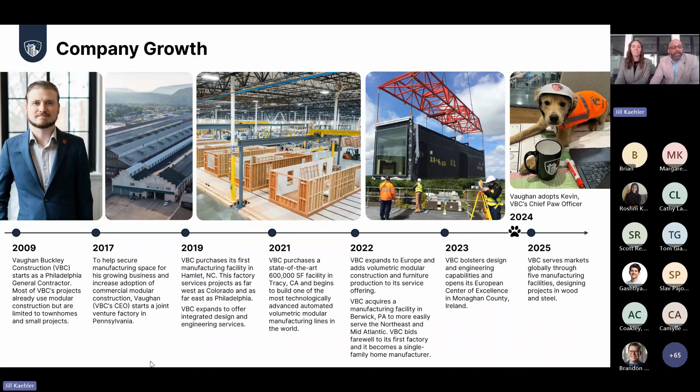There we go. So why modular? What are we here to learn about today? Time is money. In an industry where costs seem to only be going up, every month that we can save on the front end is a month of general conditions. Every month on the back end is a month of operating revenue.

Certainty is super important. Providing certainty starts with increasing predictability. For VBC, that's all about controlling supply chain and products that go into our projects. As a result, the volumetric modular portion of a project is often the largest percentage of a project, thus increasing the certainty over the entire project.

Better buildings. The manufacturing process itself really provides a level of quality control over simple things and simple tasks like draft stopping, sealing of exterior penetrations, things that just aren't possible with site-built construction. And as a result, every project we provide inherently performs better.

Sustainability comes standard with our product. You're not paying more for something that really should be common practice. For VBC, this is not a marketing message. I know that's common out there in the world today. It's embedded in the way that we do our business. Improved efficiencies. Automation provides a more consistent takt time with greater accuracy than any site-built construction can. It's a great advantage that we offer.

And then lastly, flexible designs. As a client, leverage our catalog of standard units, finishes, and products to fully unlock the advantages volumetric modular can provide.

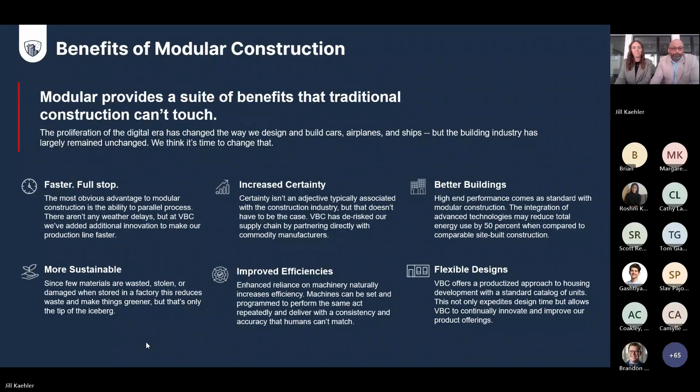So what we're here to talk about, the word modular can often mean a lot of different things across the globe and to a lot of different people. Specifically for us, volumetric modular is where the entire 3-dimensional units are manufactured offsite, transported to the site for assembly. These units include structural elements, interior finishes, full MEP services.

This is really the heart of the value proposition volumetric modular provides. It's really that balance between providing the highest possible level of finish inside the units that minimizes the cost to connect and complete once on site.

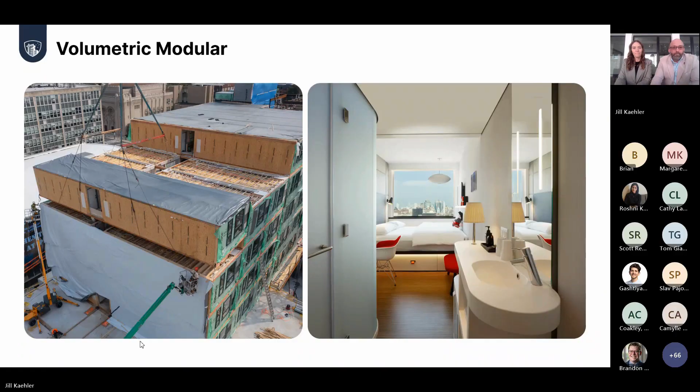So where do we do this? Where do we make sense? So from our Berwick facility here, Northeast PA, using our VMX product, we do Type 3 and Type 5 wood frame projects. We serve a 500-mile radius and a 300-mile zone. The 300-mile zone is ideal for transportation efficiency.

It's closer, it costs less to transport, while areas in the 300 to 500 will often incur a slightly higher premium for transportation. It's further away, it costs a little bit more to ship them there. It makes sense. Oftentimes, these are also going into lower cost of labor areas as well. And that combination can make projects in this radius sometimes financially challenging.

That said, there's also projects on a case-by-case basis that break down this conventional wisdom. Some of the reasons why are the lack of available labor, think limited construction seasons, and maybe that you have the need to just truck in all your materials anyway. Modular can also make sense under any one of those circumstances.

For later reference, our case study 1 that Jill will talk about later is a project that's within the 300-mile radius, and you'll see the values that creates. And then in case study 2, that one's outside of that. That's within the 500-mile radius, and we'll talk about the impact the location specifically has on selecting modular for each of those examples.

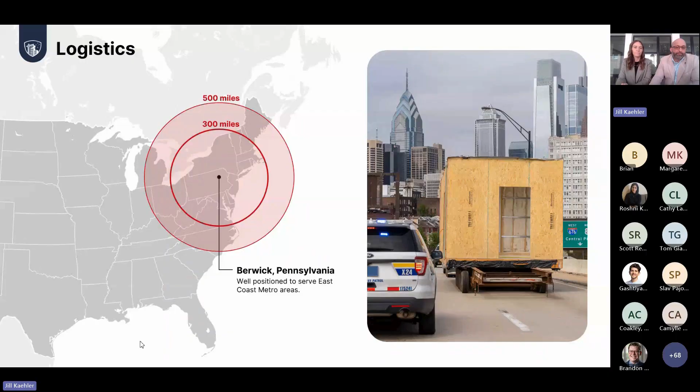Oops, sorry, apologies. So why modular? Why VBC? We've really been fortunate. We've done 3.6 billion in real estate assets, 6,000 modules. We've got an incredible team with a lot of experience, and we're really looking to offer that experience back to the industry to help drive the entire construction sector towards making volumetric modular their preferred choice and not just an interesting option.

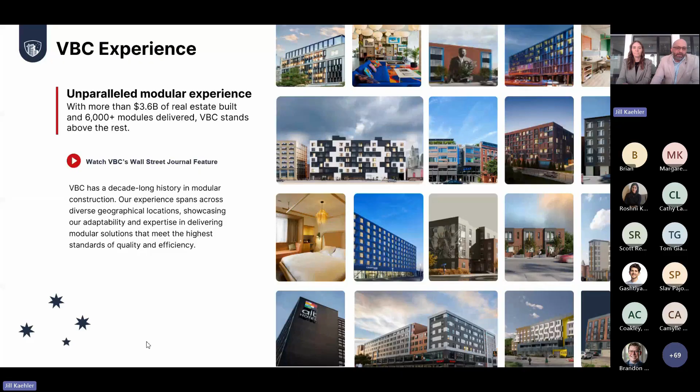And then a few examples of that relative here, student housing examples from our U.S. portfolio. This project was providing privatized off-campus housing for UC Berkeley. It's named 44th Street. It's in Oakland. It's a West Coast project. It was about 150 beds, 5 modular stories, 143 modules.

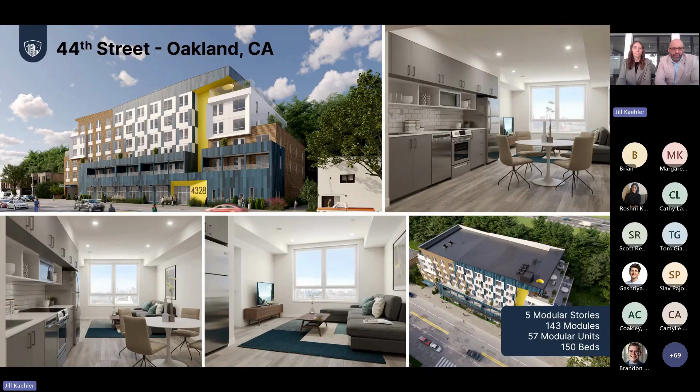And then our next one here is another West Coast project in Berkeley, California, called 1598. This one was much larger. It was about 245 beds, and again, also provided privatized housing for off-campus students at UC Berkeley.

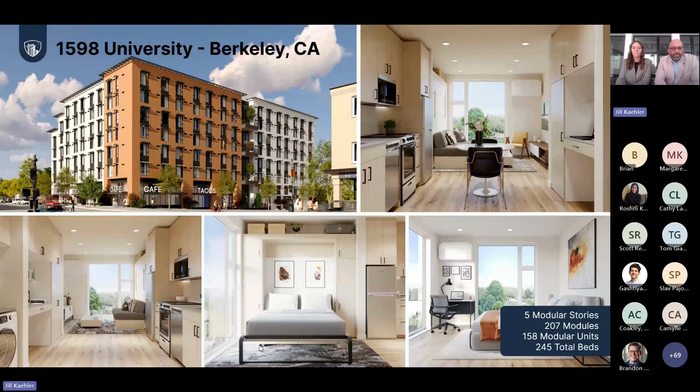Lastly, as a value-added service to our student housing clients, we offer the ability to also include and install project-specific furniture packages during modular unit manufacturing. This contributes to the project's ability to maintain schedule and deliver on time. It's a value-added service a lot of our clients take advantage of.

Hand it over to you, Jill. Thank you.

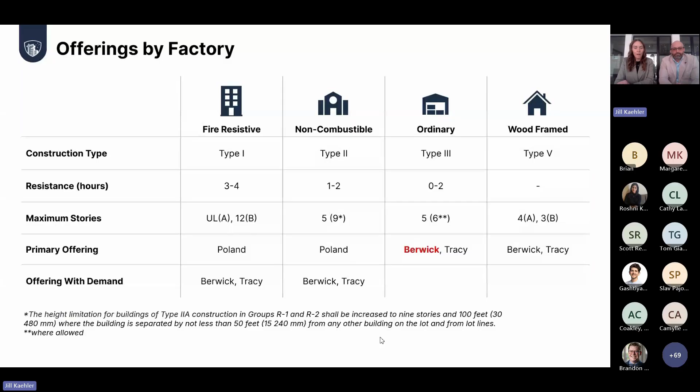So VBC has multiple product offerings, including our VMX wood and our VMX steel systems. Today, we will be reviewing 2 case study projects from our Berwick manufacturing facility that are Type 3A. Both of the projects are 5 stories in height. But before we start, let's get a quick overview of some modular vocabulary that may need a quick explainer.

A mate wall or a long wall of the module is where 2 modules meet. A short wall is where modules typically face the exterior, also called end walls. We do sometimes call the corridor walls short walls as well. A full module consists of 2 volumes built together with a central corridor. So on the line, that is 1 shared floor assembly. A half module consists of 1 volume with or without a corridor.

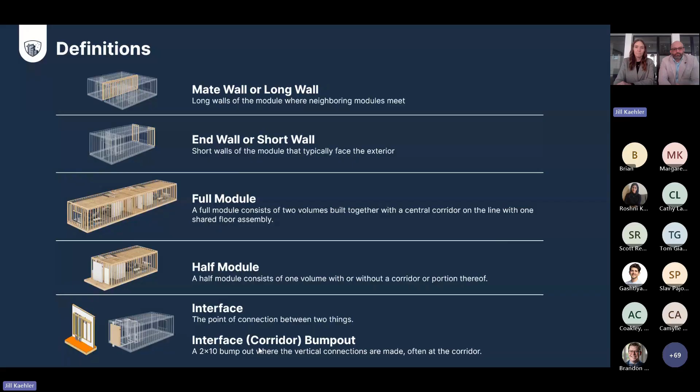And an interface is a point of connection between 2 things. An interface bump out, or we also call it a corridor bump out, is a 2x10 bump out where the vertical connections are made, often at the corridor. A tower is 1 vertical stack of modules within a multi-story building.

VMX is our brand offered by Volumetric Building Companies that encompasses a range of modular systems and components designed to streamline construction processes, enhance sustainability, and deliver high-quality results. VMX may be a selection. It may also be a system. DFMA is an acronym that stands for Design for Manufacturing and Assembly, which means products are designed to work with manufacturing and assembly methods in place.

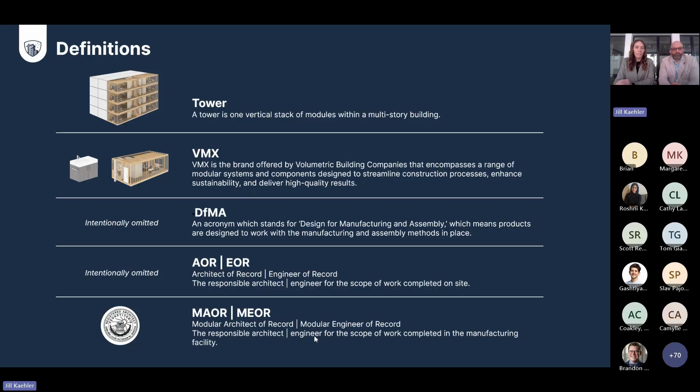AOR and EOR is Architect of Record, Engineer of Record. They are the responsible parties for the scope of work completed on site. MAOR and MEOR is Modular Architect of Record, Modular Engineer of Record, and they are the responsible parties for the scope of work completed in the manufacturing facility.

The 2 most common ways that VBC is engaged on projects is 1, a client wants to switch to modular from site built for various reasons and already has approved drawings. The VBC team then works with the AOR to convert those drawings to modular. Or 2, a client knows they want modular construction from the onset of the project. Often they have experience with modular and want to continue on that path. In this case, the VBC team designs alongside the AOR through a series of meetings and workshops.

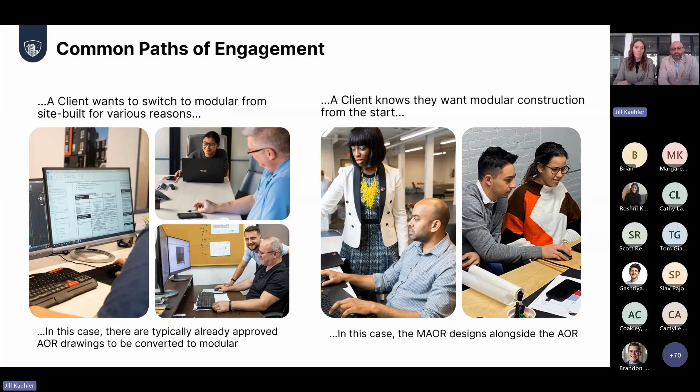In our design process, there is a defined set of parameters we refer to as the system's non-negotiables. These are determined by either transportation, set, or manufacturing requirements. For our VMX wood coming out of Berwick, Pennsylvania, our modules are limited to 68 feet in length and fall between 11 feet and 15'9" stud to stud in width.

Our height limitation is that the trailer and the module cannot exceed the DOT maximum shipping height. In many states, this is 14'6". However, in the New England states it is lowered by 1 foot to 13'6". As a result, depending on the transportation route, VBC offers 2 standard unit ceiling heights of 8'6" and 9 feet.

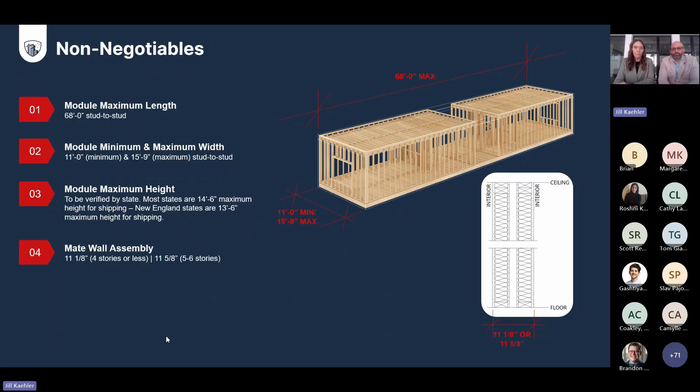Our mate wall assembly is 11 1/8 inch for 4 stories or less, and 11 5/8 inch for 5 and 6 stories. Our VMX wood system is line loaded with predominant shear forces on mate walls. Secondary shear is often provided by perforated shear located at the corridors. The structure utilizes a semi-balloon frame or inset ceiling for typical floors, while the roof structure is platform framed.

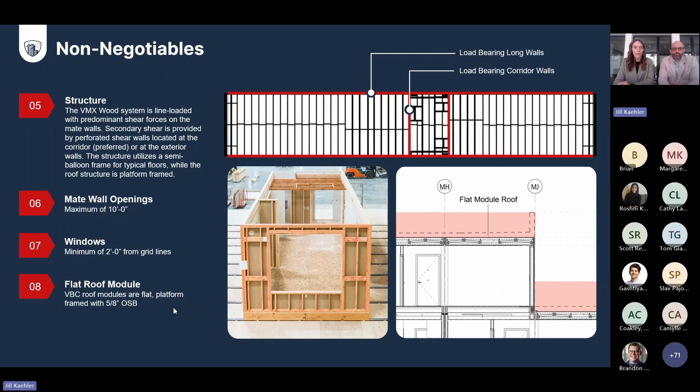Our maximum opening in the mate wall is 10 feet, and windows should be located a minimum of 2 feet from grid lines to allow adequate room for stud packs. This is especially important in high seismic zones.

Moving from the non-negotiables to the recommendations, we've developed a comprehensive list of suggestions, most of which are focused on the zone of the unit closest to the corridor. This area is intentionally designed to be dense with plumbing and mechanical systems, enabling the remaining space to be flexible and adapt to specific project needs.

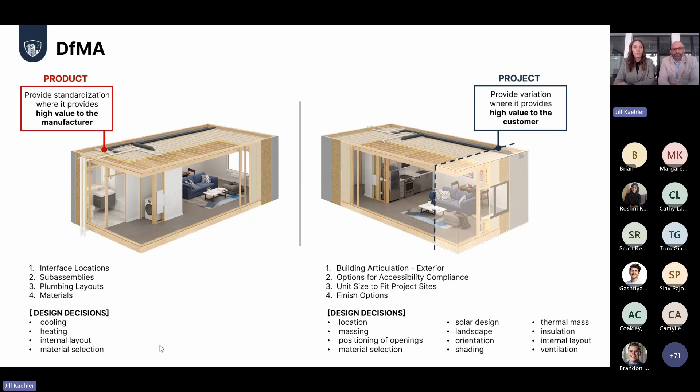These recommendations offer the best balance of value, quality, and schedule for our clients, supporting the goal of DFMA while streamlining on-site installation. We see this as a distinction between product and project. Product is where standardization provides a high value to the manufacturer, and project is where variation provides a high value to the customer. We are constantly trying to find an appropriate balance between the two.

While there are non-negotiables and recommendations for modular projects, there are several positive trade-offs. First, our modular units offer great acoustics. Our mate wall assembly, the demising wall between two units, is an STC 61, as tested by an independent third party in field. The floor ceiling assembly between two stacked units is an STC 58.

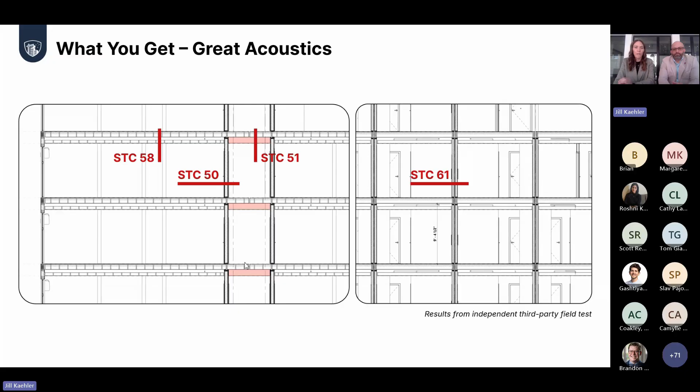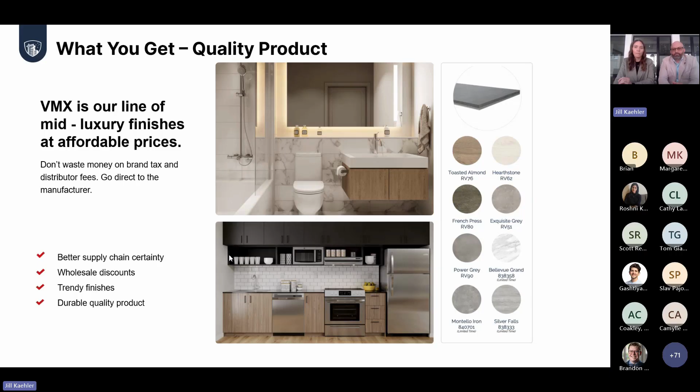Second, our VMX selections are mid-luxury finishes at affordable prices. As a modular manufacturer, we work with preferred partners to arrive at the best balance between quality and pricing for our customers. Third, we have designed our VMX wood system for simple on-site installation. We bring all of our vertical connections through the fire-rated wall to the corridor in order that the trades can complete their work outside of the finished unit.

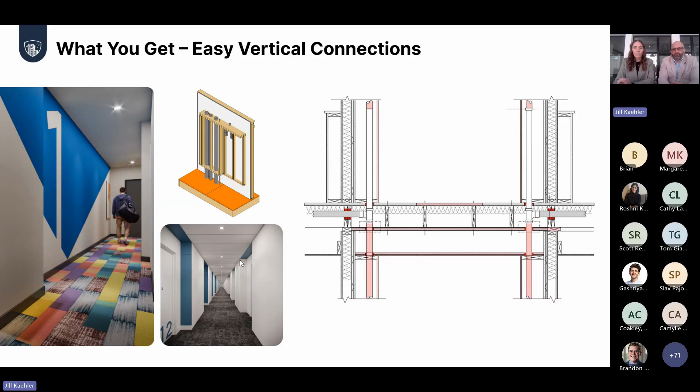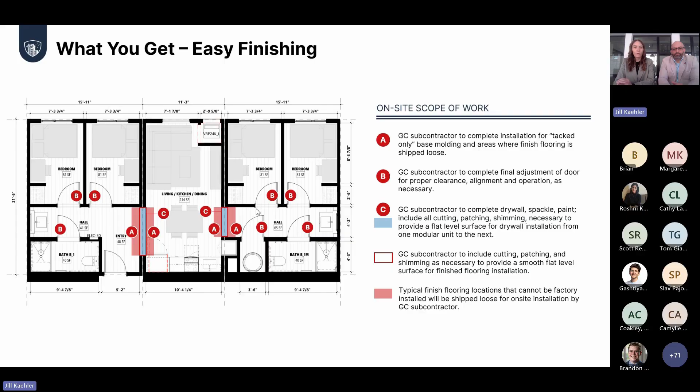Fourth, at times, there is minor work that needs to be completed in unit, and a scope of work diagram will be produced early in the process in order that the on-site GC may appropriately bid the work. The items required to complete the work will be shipped loose with the module. Okay, let's jump into it. Case study number one.

Case study number one is an undergraduate student housing project consisting of 1,709 beds located in 3 buildings of 5 modular stories. Portions of the buildings are slab on grade, while others have a level of site-built construction underneath the modular podium slab. The GC was looking towards modular construction to solve labor shortages and increase quality. We began our engagement with the GC team when the AOR documentation was in design development.

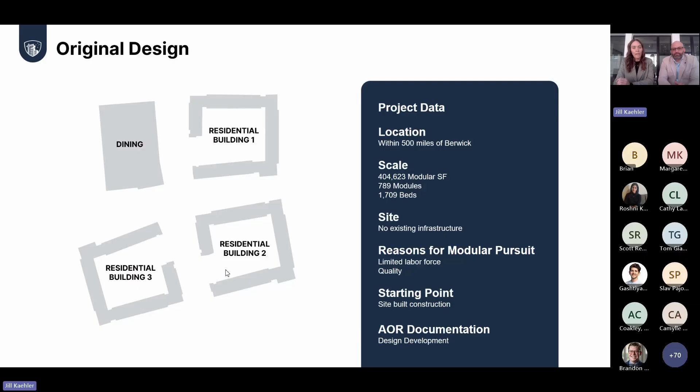Here is an image of residential building 1. The areas highlighted in red represent the site scope. For the facade, windows and the weather barrier are installed in factory, while the facade materials are installed on site. The building aesthetic will largely remain the same. The storefront glazing is able to be site installed. Otherwise, if the client wishes to have that installed in factory, it would need to be converted to a punch window opening.

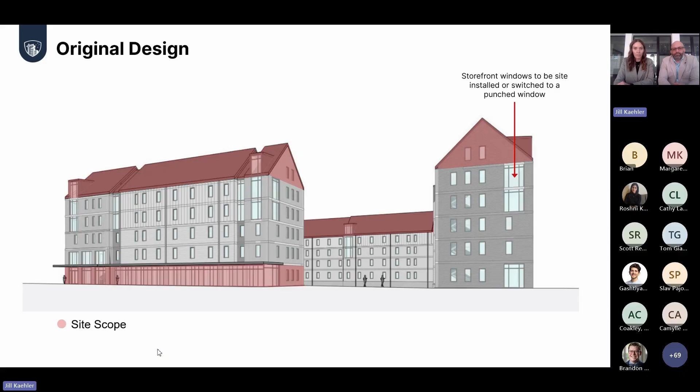In plan, we moved the resident advisor units to level 1 due to the offset corridor. You can see that here in the diagram. As level 1 has a greater height, they utilize drop deck trailers to stay under the maximum DOT transportation requirements. We have more space to offset the vertical connections.

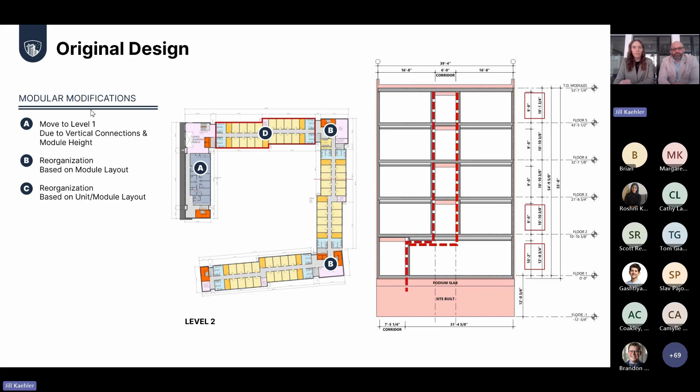The nodes of the building, the corners where the service and amenity spaces are located, have been reorganized to fit into modules. The unit block highlighted by the red line, which repeats across all buildings, was optimized to reduce the number of modules required while keeping the spaces and bed count the same.

For case study number 1, we can fit 4 single rooms in a 15'9" stud to stud width or 15'11" grid line to grid line width module, which is our maximum width. This will be the best cost as it reduces the module count, number of transportation loads, and crane picks. If clients elect, the furniture within the module can be fully installed in factory and shipped with the module.

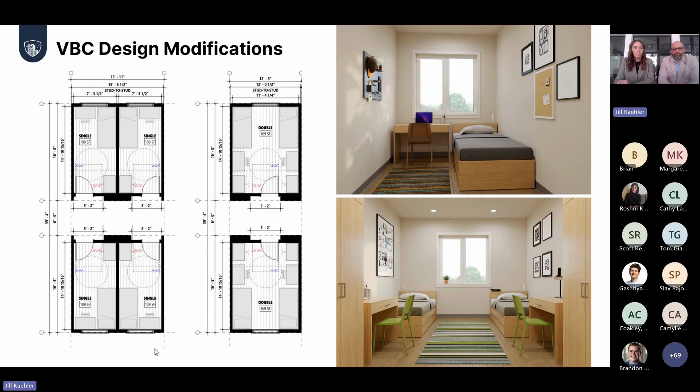By grouping the 4 single rooms into one module, this changes the layout of the unit block. We move the 4 single rooms to the center, which is a 15'11" wide module, to correspond with the resident advisor unit below, which keeps the tower width aligned. The 5th single room is opposite the amenity space and can swing between a single or double depending on the enrollment needs. We adjusted the walls based on the VBC assemblies, keeping the interior dimension of the rooms.

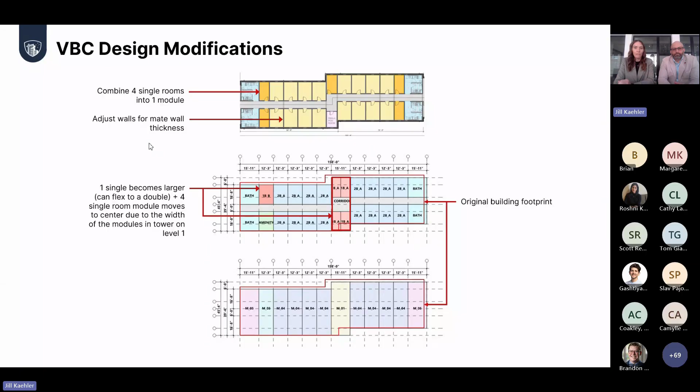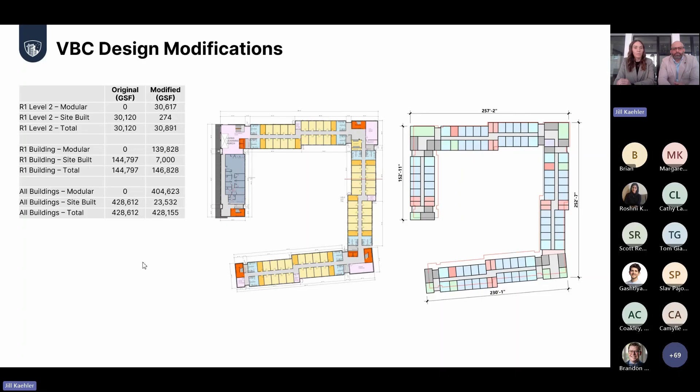The original footprint is overlaid with a red line on the unit and modular plan, illustrating the minor shifts from the original layout. Once we incorporate these modifications over the floor plan, we compare the original versus modified square feet. For level 2 of residential building 1, it was 30,120 square feet, and the modified version is 30,891 square feet, a difference of 771 square feet or a 2% increase in area per floor.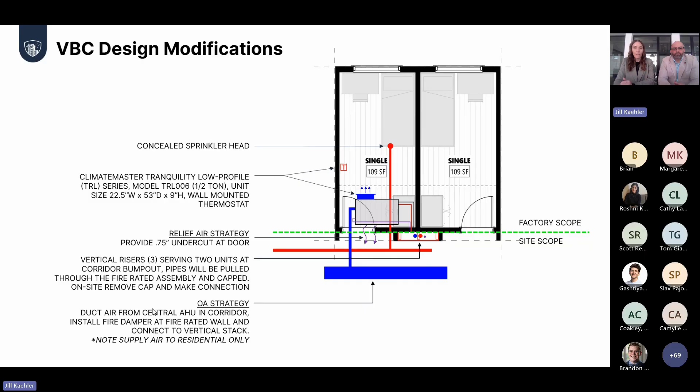With those modifications, we then run the efficiency numbers to understand the project complexity and factory throughput. Is this project DFMA friendly? In this case, wow. We have 789 modules divided by 82 unique modules, achieving a modular efficiency of 9.62. There are 975 units divided by 9 unique units, giving us a unit efficiency of 108.3.

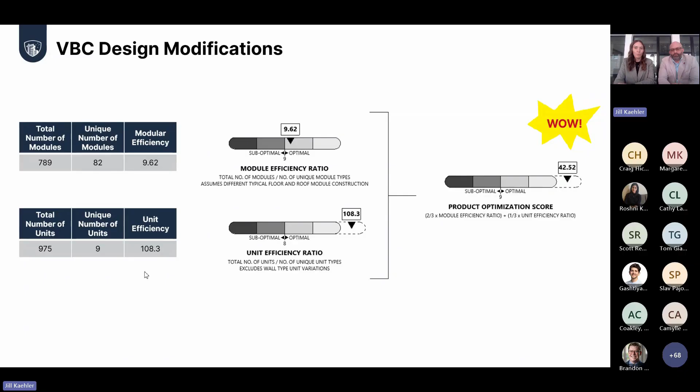So then we take 2/3 of the module efficiency and 1/3 of the unit efficiency, and we receive a product optimization score of 42.52. This project is a great project for manufacturing.

Awesome. Thank you, Joe. So let's talk schedule. Faster time to market. So in modular construction, site development and foundation work occur simultaneously with the manufacturing of the volumetric modular units in the factory. This parallel processing can make modular construction faster than traditional site-built methods. In this case study, our schedule advantage was improved by the ability to turn over one building while the other buildings were still under construction.

Generally speaking, the larger the project, or a project with multiple buildings, the greater the schedule advantage. By developing a logical flow to the project that allows for overlapping of construction items like podium work, modular unit installation, and overall completion, the greater the potential for the schedule savings. For example, while building 1 is having the volumetric units installed, building 2 could be constructing the podium. Building 3 could then be breaking ground.

Modular unit manufacturing runs uninterrupted, and the units begin to be delivered and installed to supply this flow. This also minimizes the amount of time the volumetric units need to be stored. Schedule is really where we can realize the savings that volumetric modular construction can offer, especially on a student housing project that often has a start date that tends to slip, but with an end date that can't move.

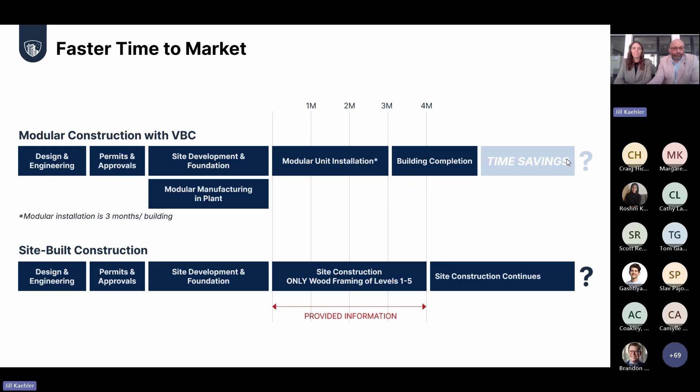So this is a good example of how a project's location, like I mentioned earlier, and the site-specific requirements can impact the value modular can provide. This example was in a low-cost labor market with a high amount of site construction and site development work that even going modular could not offset and provide a savings to the overall project. Being cost neutral doesn't mean modular isn't the best choice for the project. It simply demonstrates that there isn't always a hard cost savings to be had.

That said, with a semester or a full calendar year of operational revenue, what is that worth to the university? The revenue on a per bed basis varies from client to client, of course, but that revenue needs to be part of the overall cost savings analysis when evaluating modular over site built.

In this example, the volumetric modular units were largely just bedrooms. This example opted for a more conventional common bathroom style design, meaning we didn't have kitchens and bathrooms in all the living units. They had a common area for that. And as a result, the cost savings that we did have available on the manufacturing side was really less, because the spaces that we were providing were less labor intensive and they were distributed a little bit more throughout the entire building.

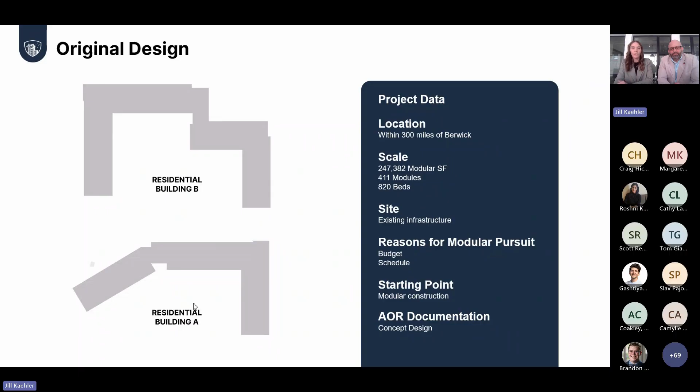And Jill, I'll flip it back to you. Case study number 2. All right, case study number 2 is located within 300 miles of Berwick with 820 beds spread across 2 buildings. The reason the GC pursued modular was to enhance both the budget and schedule. They are a repeating client with modular experience, and the GC elected to pursue modular from the onset of the project. We started by reviewing the conceptual unit plans, applying our non-negotiables.

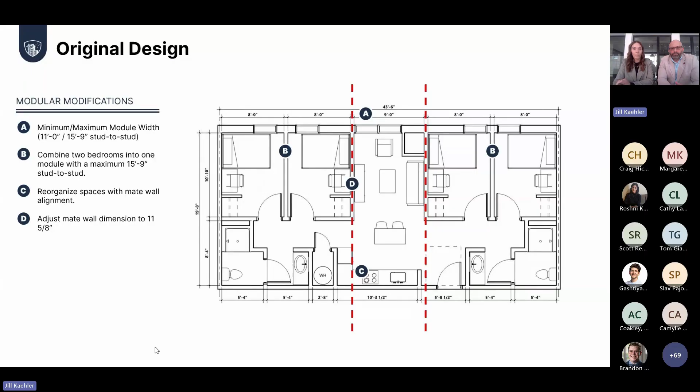Again, here we looked at grouping 2 single beds into a 15'9" stud-to-stud module width to reduce the overall module count. At the same time, we needed to increase the living space to meet our minimum module width. This increase allowed for the linear kitchen to be located within the module width, so we do not have the crossover of the kitchen over 2 modules.

After the module reorganization, we reviewed the net square feet. The original was 845 square feet, and the modified plan is 821 square feet. Outside of the unit net square feet, we do add some additional space for our corridor bump out where the vertical connections are made. Here are some sample images of the unit that show the space with furniture, all of which can be provided in factory and shipped with the module.

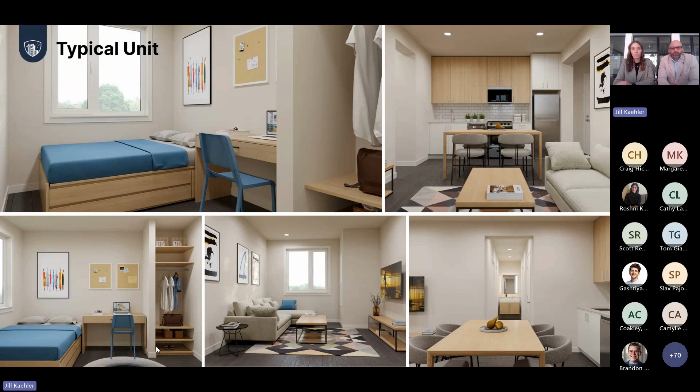As we are building everything in a 3D model in Revit, we can very quickly visualize what the spaces are on both the interior and exterior, providing great value to our clients in their decision-making process. In early discussions with the GC, we decided that the elevator core would be site-built and the modules would be set outward from the core. As the project is from our Berwick manufacturing facility where we produce full modules, alignment across the corridor is required. The typical modular modifications were applied with the minimum and maximum width, plus the mate wall assembly thickness.

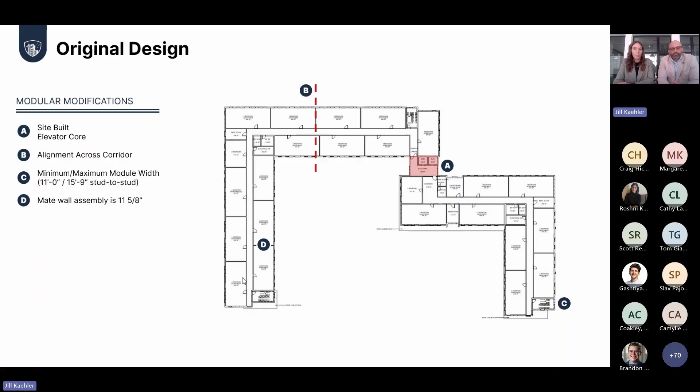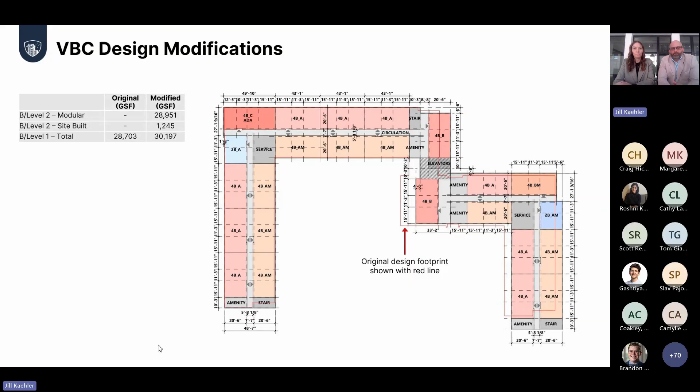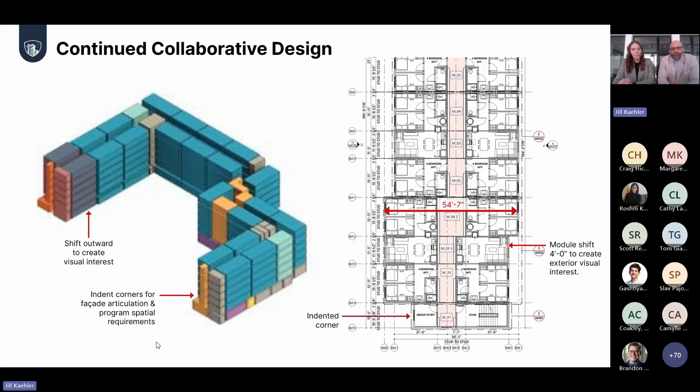So then we immediately went and looked at what does this look like from plan to 3D. And our first reaction as a collective team, looking at the renderings, was that the building was too flat and needed some more articulation. So we went back together with the AOR and we looked at how we can shift the massing and add module indentation to create visual interest on the exterior. Modules can move relatively easily in and out in length as the space is not system heavy and has fewer interfaces. And so the result of that coordination is shown here.

Minor shifts that can help the overall experience of the building with its surrounding environment and passersby immensely. And as we continue through this iterative design process, we advise the team on where modifications will impact or will not impact the modular approach.

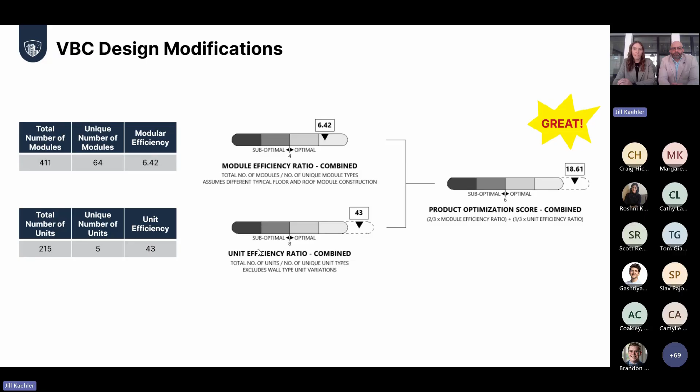For this case study, we have 411 modules divided by 64 unique modules for a modular efficiency of 6.42. There are 215 units divided by 5 unique units for a unit efficiency of 43. 2/3 of the modular efficiency plus 1/3 of the unit efficiency creates a product optimization score of 18.61. Great score for this project. Awesome. Yeah, that's a great example.

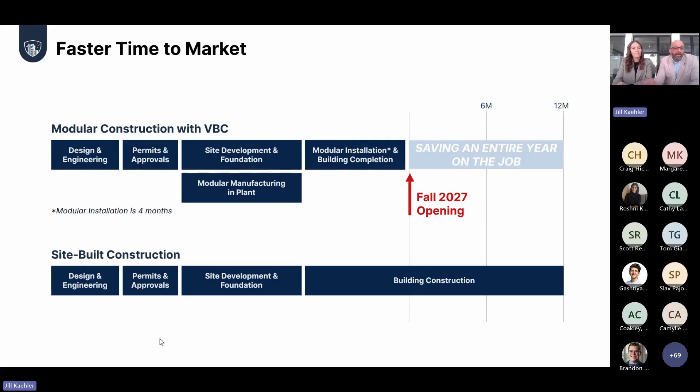So let's add that up. What's that worth? This is what it's all about. This is what you came here to see, right? Where is modular more cost effective? It's right here. It's in all the things Jill just went through. The significant hard cost savings plus the ability to generate an entire year's worth of revenue made the decision to use modular an easy one. This 20% does not include the revenue bonus. That's to the client's benefit. That's not for us to quantify in this example.

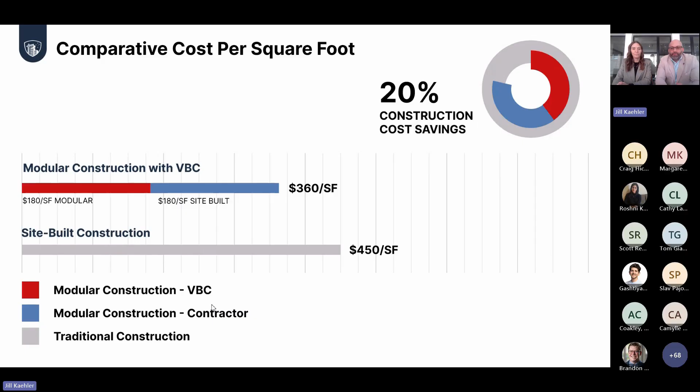A side note here. So even if we are adding additional building square footage, like Jill mentioned earlier, because of the requirements of volumetric modular, we're still less cost overall and per square foot, but giving the client more for their money, essentially giving you more building for less cost. Where we're adding that square footage, we're not adding kitchens, we're not adding bathrooms, we're adding square footage in some of the more cost-effective areas. So therefore, there's no negative cost impact. And that's really what efficiency is all about.